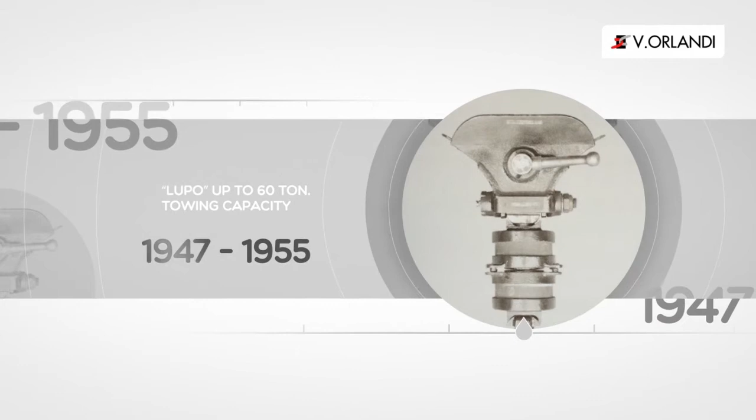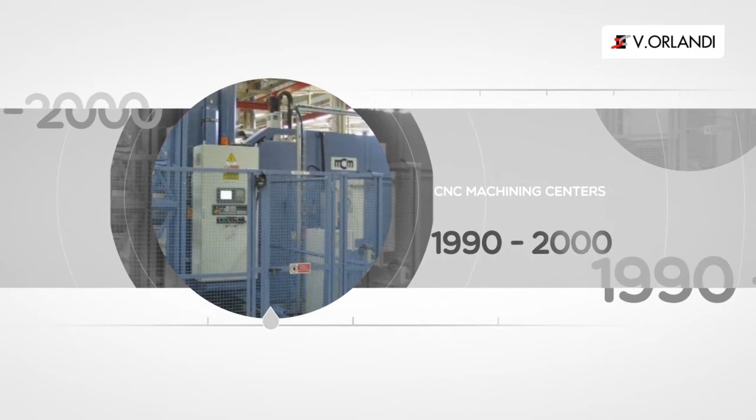The V.Orlandi product range includes manual and automatic drawbar couplings, pintle hooks, a full range of drawbar eyes, tow bars, 2-inch and 3.5-inch fifth wheels, mounting plates, fifth wheel sliders, ball races, landing gears, and kingpins. V.Orlandi is certified to ISO 9001 and ISO TS.

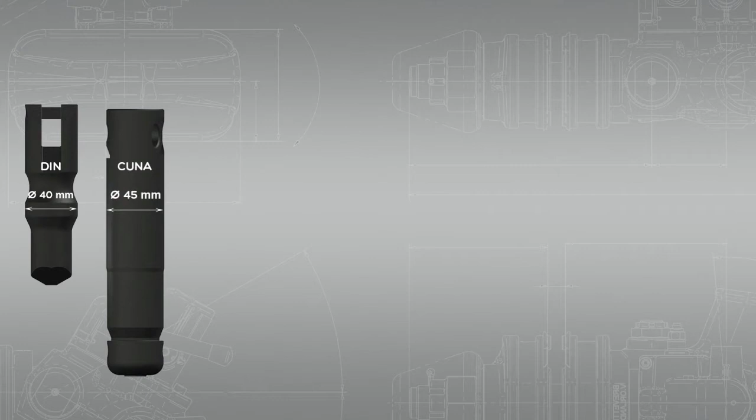V.Orlandi manufactures drawbar couplings according to national and international standards. German 40 mm DIN standard, Italian 45 mm Cuna standard, worldwide 50 mm ISO standard, French 50 mm BNA standard, Swedish 57 mm standard, V.Orlandi 70 mm heavy-duty standard, worldwide 76 mm NATO standard.

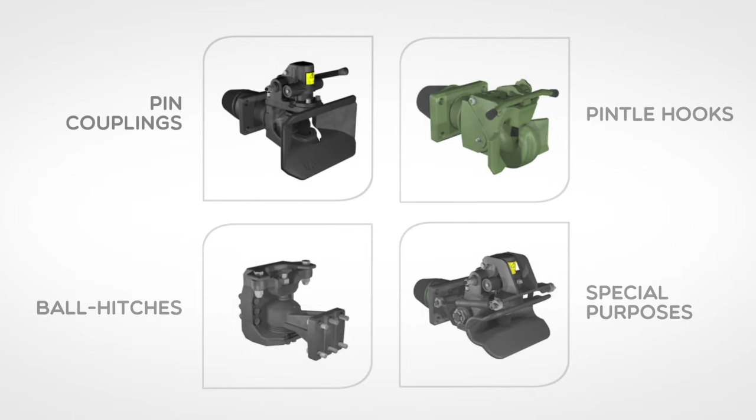Drawbar couplings can be divided into 4 main categories: pin couplings, pintle hooks, ball hitches, and special purpose. Pin couplings are those drawbar couplings with a certain diameter pin, a bell mouth, and an automatically closing and locking pin on the towing vehicle. The diameter of the pin follows national and international standards, such as ISO, DIN, Cuna, and BNA standards.

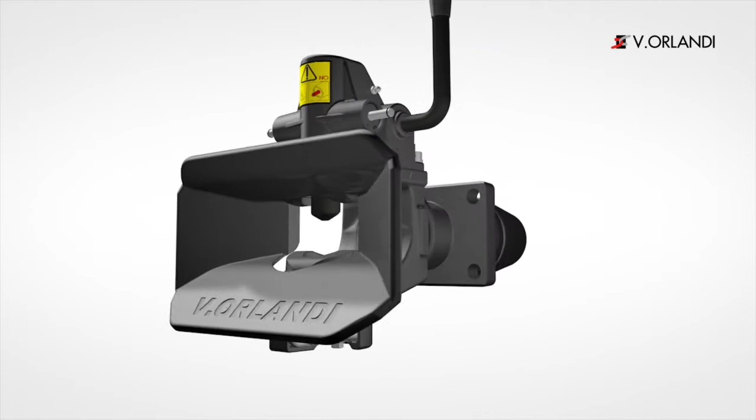Let's see an ISO standard coupling. The E50 is a rigid 50 mm automatic drawbar coupling. Automatic means that the operator has to open it manually, but during the coupling operation, the tow pin will close automatically. The 2 rubber buffers encapsulated into the rear flanges allow the drawbar coupling to absorb the shocks when driving. The 2 rubbers also maintain the tightening torque of the rear nut.

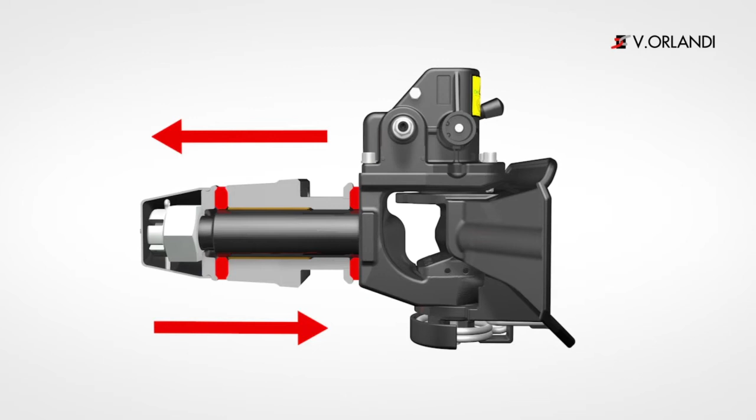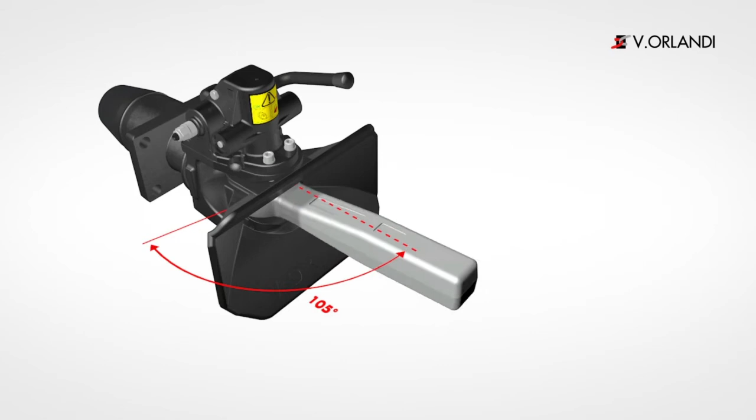This type of coupling is also called rigid, as the downwards and upwards articulation of the drawbar eye, up to 20 degrees, is made possible by the barrel shape of the towing pin. This type of coupling can articulate horizontally up to 105 degrees on both sides. Not everyone knows that all our E50 drawbar couplings can be opened at any angle.

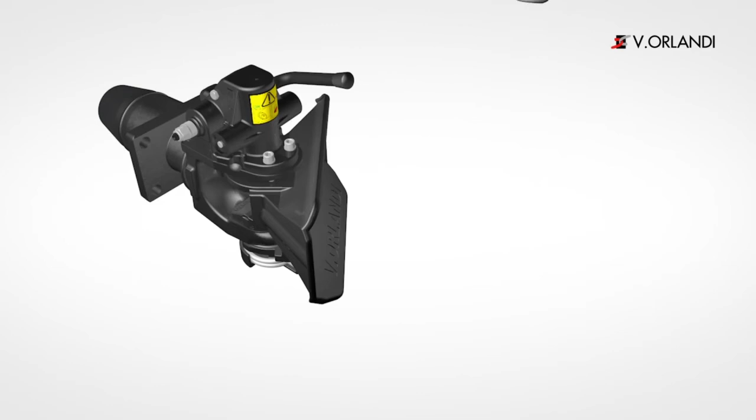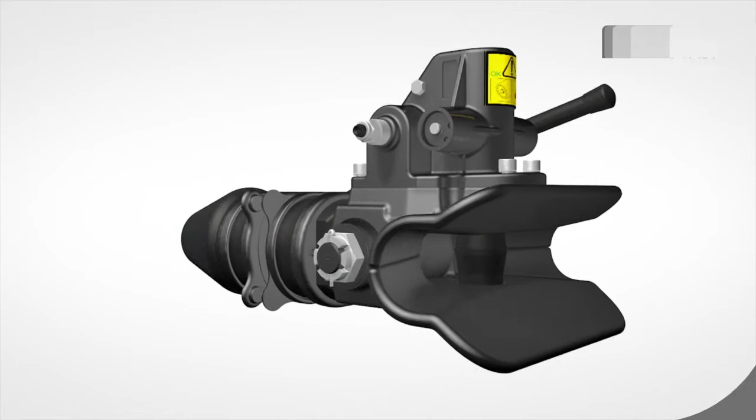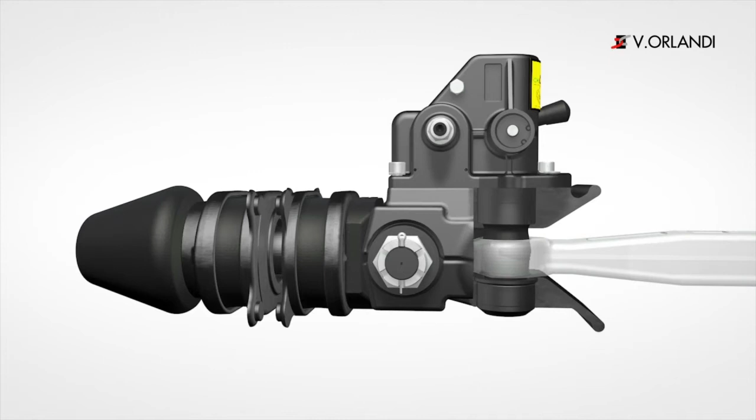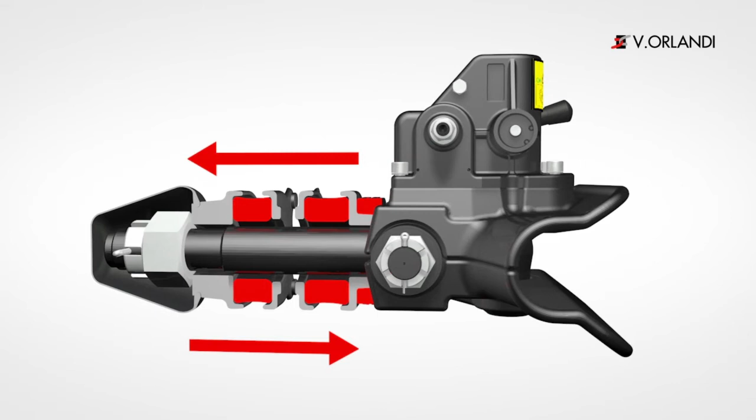Let's see a Cuna coupling. The EH50 is a pivoting 50 mm automatic drawbar coupling. Automatic means that the operator has to open it manually, but during the coupling operation, the tow pin will close automatically. The 2 rear rubber buffers allow the drawbar coupling to absorb the shocks when driving, and also maintain the tightening torque of the rear nut. The 3rd front rubber helps to keep the bell mouth in a straight position when the coupling is disconnected.

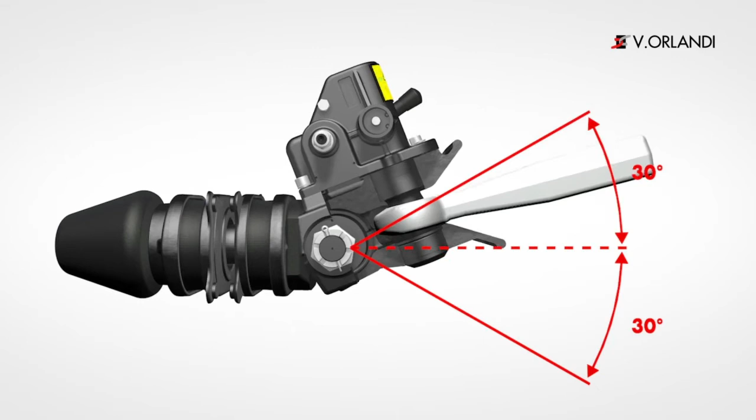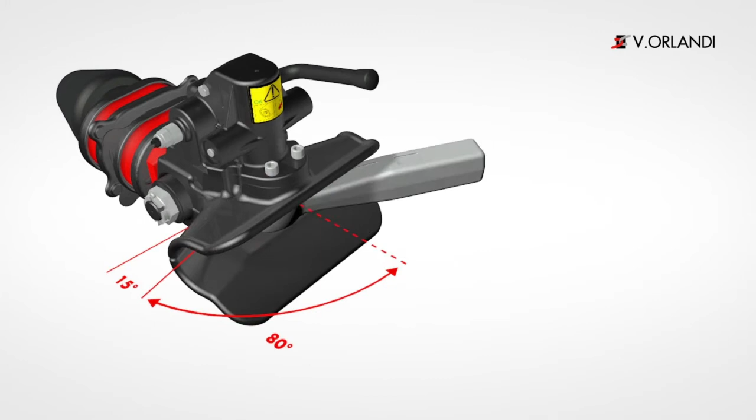This type of coupling is called pivoting, as the downwards and upwards articulation of the drawbar eye, up to 30 degrees, is made possible by the articulation pin. This type of coupling can articulate horizontally up to 80 degrees on both sides, thanks also to the 2 rear big rubber buffers that guarantee an extra 15 degrees of articulation. Thanks to their high articulation, these types of coupling are recommended for off-road applications.

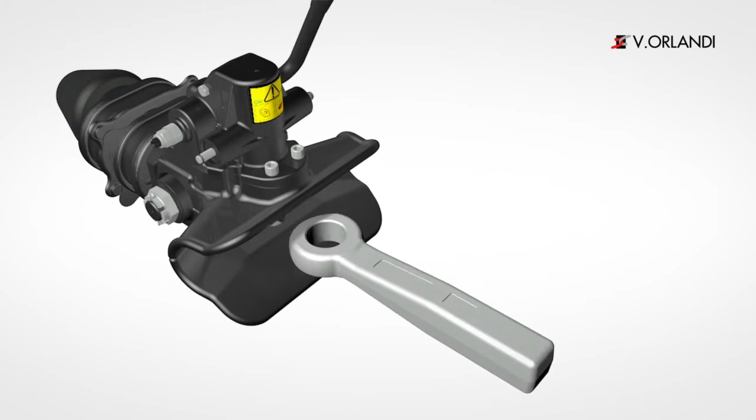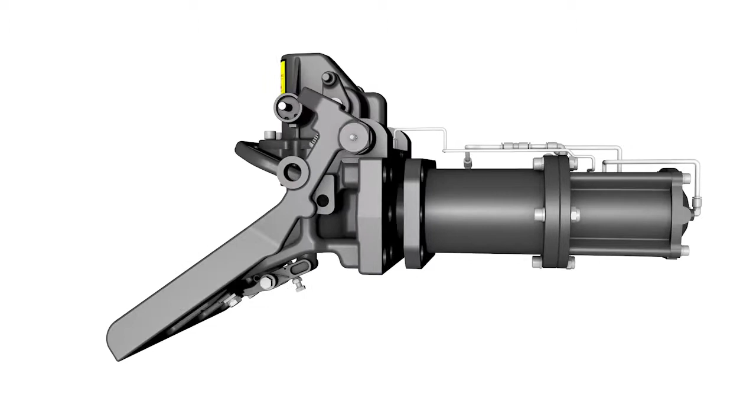Let's see a BNA coupling. The MV50 is a rigid flanged automatic drawbar coupling. Once the operator has released the mechanical safety device, he just needs to push the flap upwards and the coupling will be opened. During the coupling operation, the tow pin will close automatically. The hydraulic piston rod allows the MV50 drawbar coupling to absorb the shocks when driving.

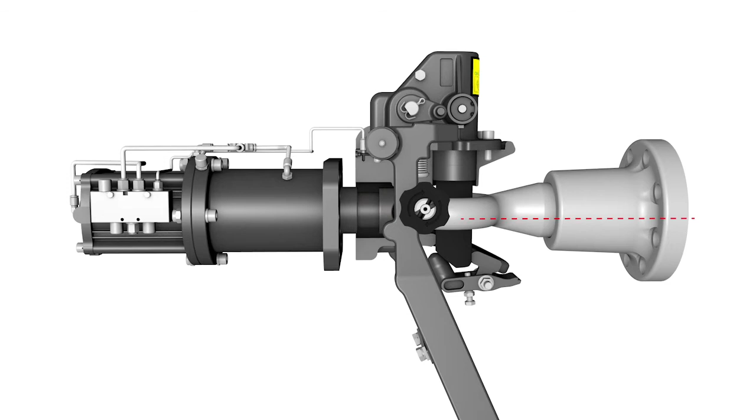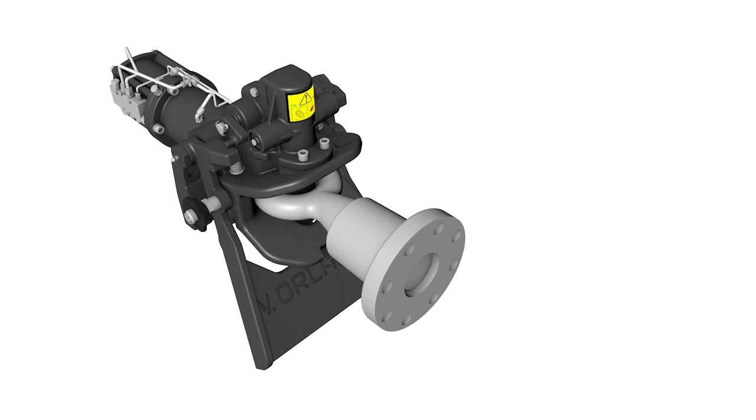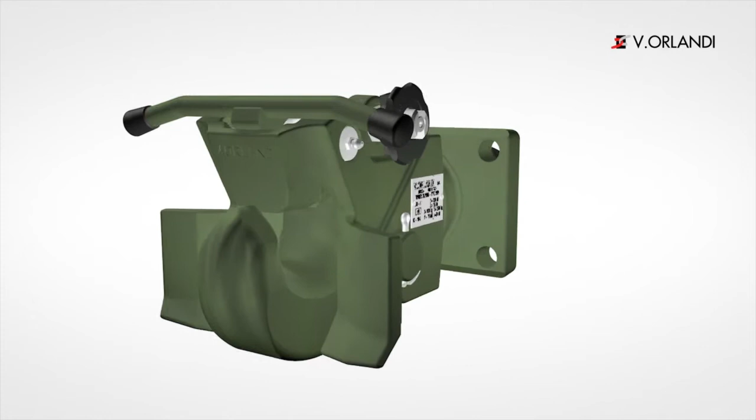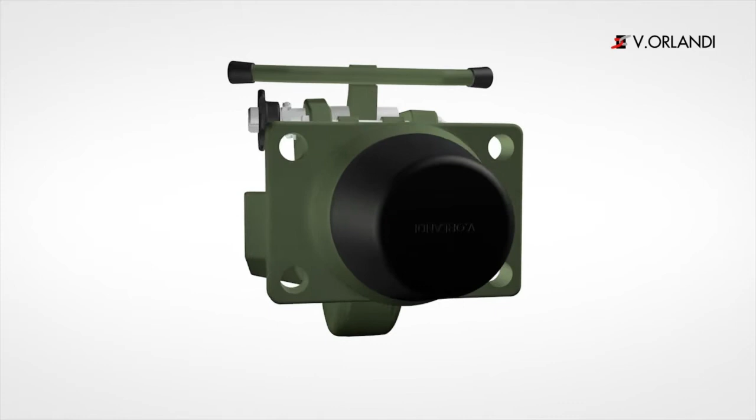Let's see a NATO pintle hook. The UN90 is a rigid 76mm automatic pintle hook. The UN90 is a dual-use coupling, as it can be used for military purposes as well as for civil ones. After releasing the mechanical safety device, the operator has to open it manually. During the coupling operation, the hook will help the operator to close the hitch properly.

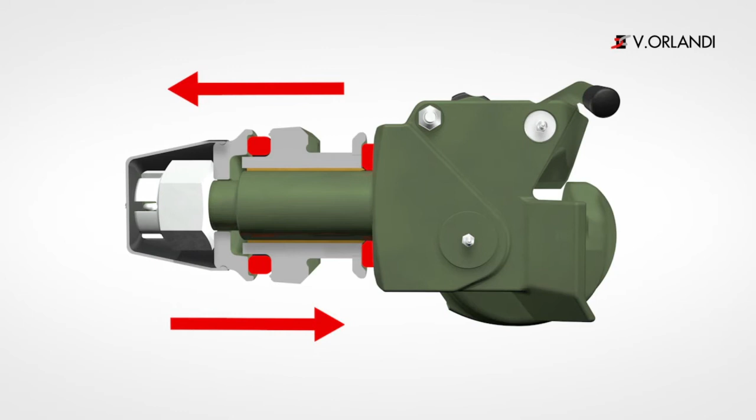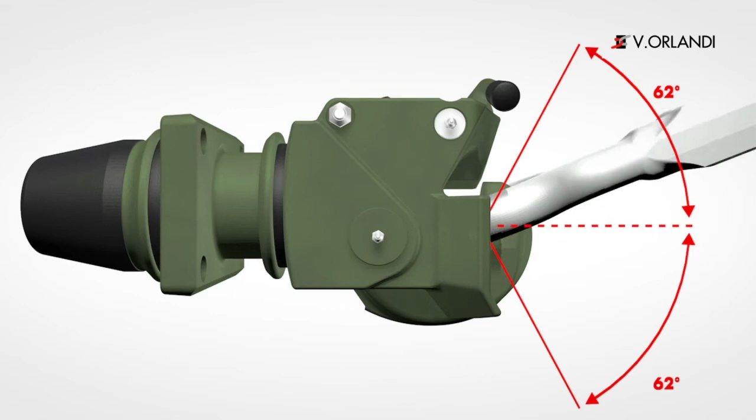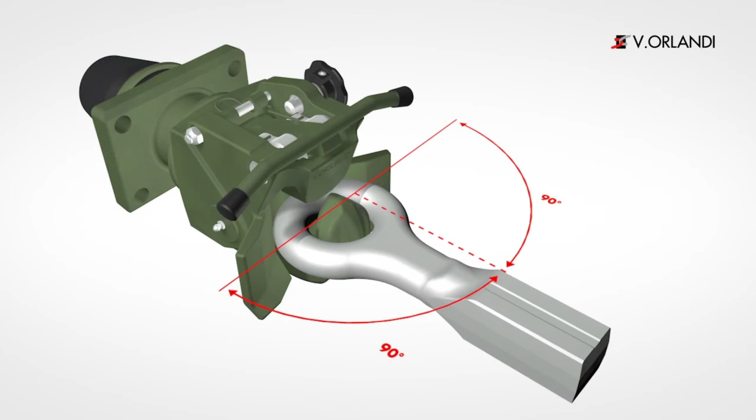The two rubber buffers encapsulated into the rear flanges allow the drawbar coupling to absorb the shocks when driving. The two rubbers also maintain the tightening torque of the rear nut. This pintle hook allows the NATO drawbar eyes to articulate downwards and upwards up to 62 degrees. Horizontally, this pintle hook can reach up to 90 degrees on both sides. The articulation guaranteed by our UN90 series is the highest in the market.

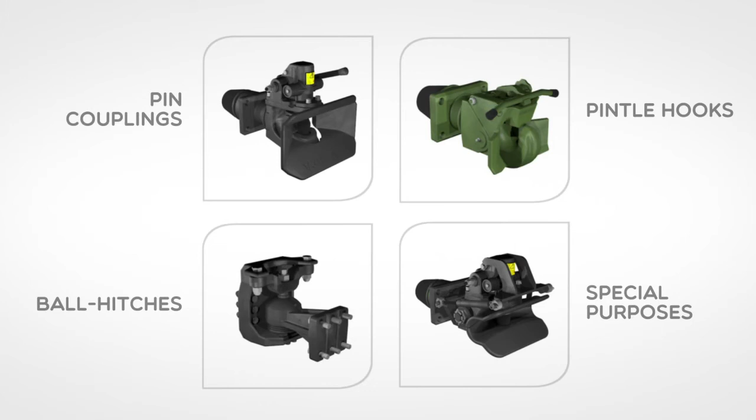Let's see a ball hitch coupling. The GS900 is a special-purpose manual ball hitch drawbar coupling. Manual means that the operator has to open and close it manually, as this type of coupling is normally used where the operators seldom disconnect the combination.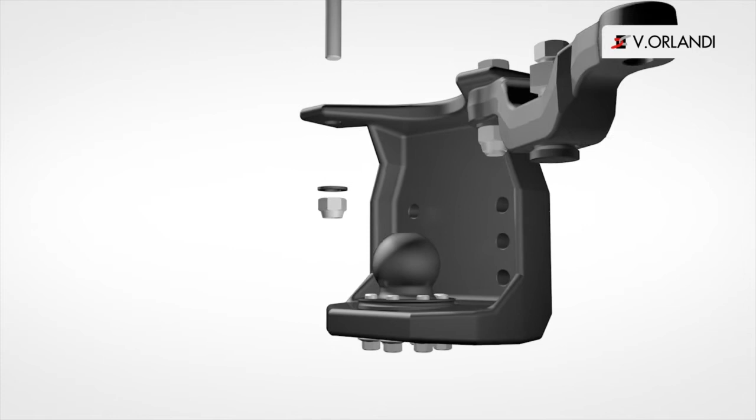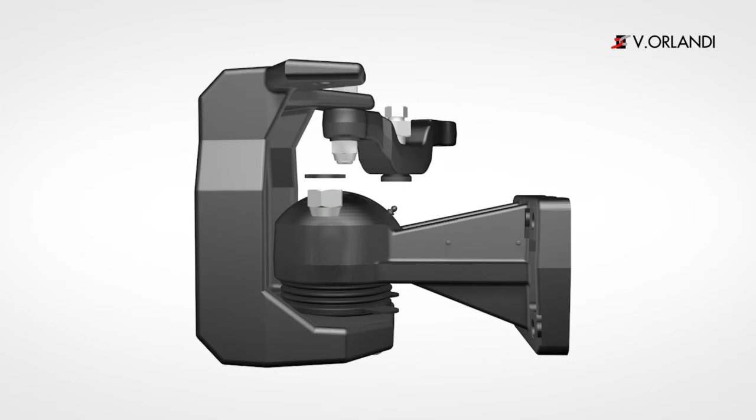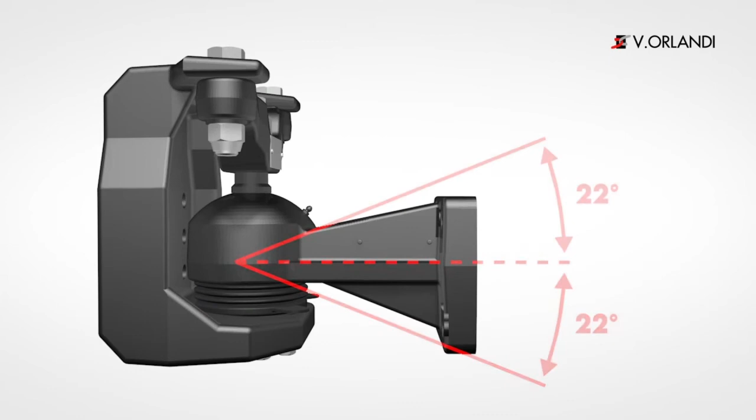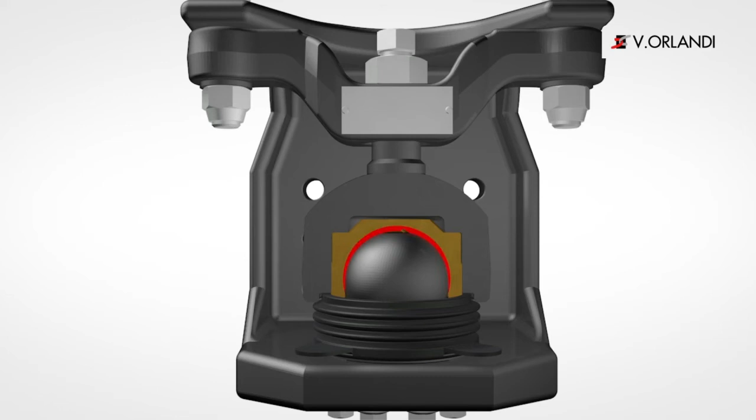The dedicated drawbar eye can reach up to 22 degrees downwards and upwards. Horizontally, the drawbar eye reaches up to 90 degrees on both sides. The bronze bush pressed inside the drawbar eye is a sacrificial component, so it has to be replaced periodically. However, before replacement time the operator can adjust the play between the ball hitch and the drawbar eye using the top adjustment screw. The adjustment will increase the life of the bronze bush itself. The GS900 was designed specifically for car transporter trucks and trailers.

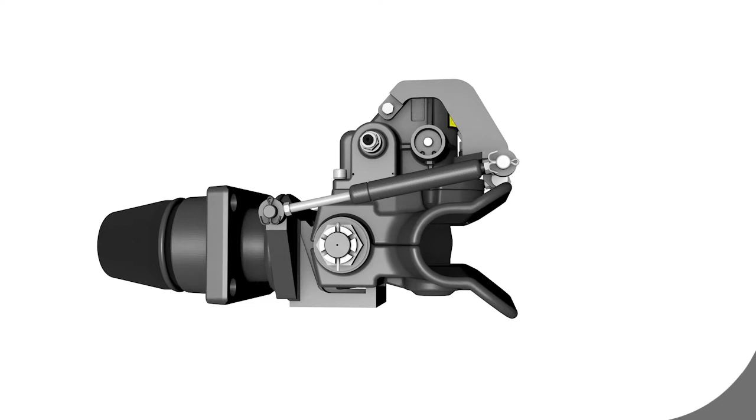Let's see a special-purpose coupling. The EH524 is a special pivoting 50mm automatic drawbar coupling. Automatic means that the operator has to open it manually, but during the coupling operation, the tow pin will close automatically. The two rubber buffers encapsulated into the rear flanges allow the drawbar coupling to absorb the shocks when driving. The two rubbers also maintain the tightening torque of the rear nut.

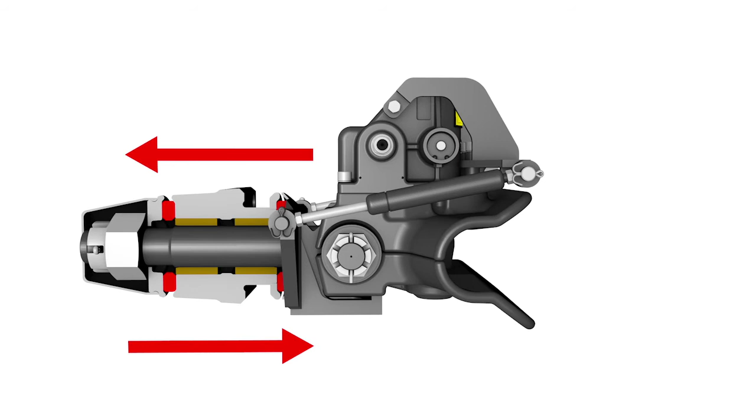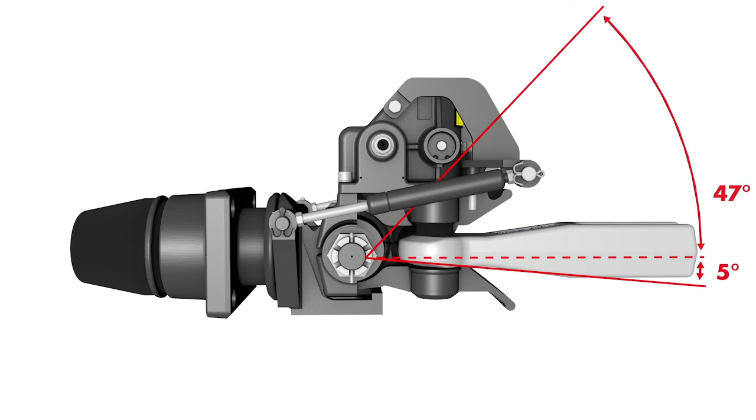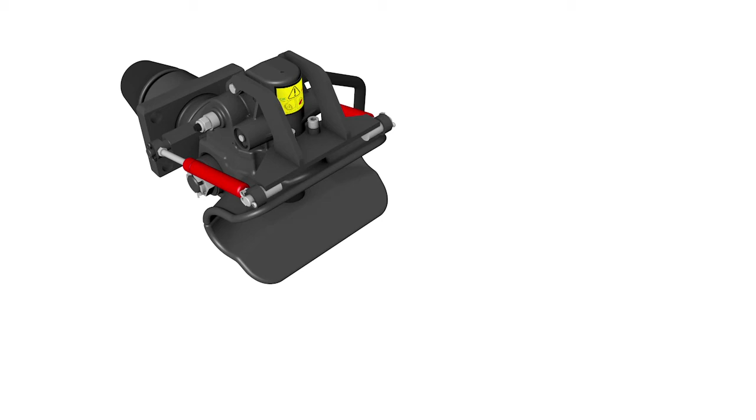This type of coupling is called special pivoting, as it can reach up to 47 degrees upwards. The EH524 can articulate horizontally up to 80 degrees on both sides. The two gas struts keep the bell mouth in the straight position when the coupling is disconnected. The EH524 was specifically designed for Australian tip-over axle trailers.

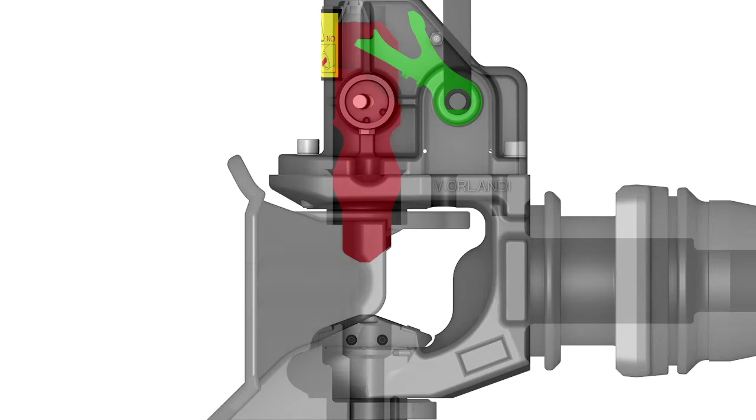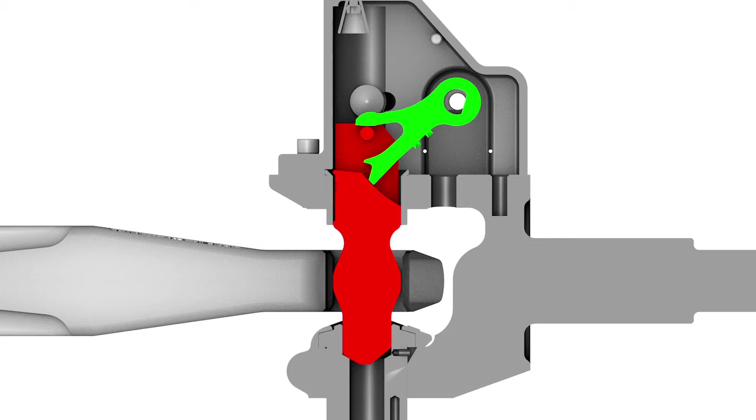V.Orlandi manufactures three types of coupling mechanism. The pin release mechanism is the most common system in the automotive market. The lifting green lever lifts the tow red pin upwards and compresses the top cone spring. The tow pin is kept in the open position by the lifting lever's machined step. During connection, the tow pin will lift up to a point where it will be forced to exit mechanically from the step. The compressed top cone spring will also help the tow pin to stay in the open position. The same scenario will happen when disconnecting.

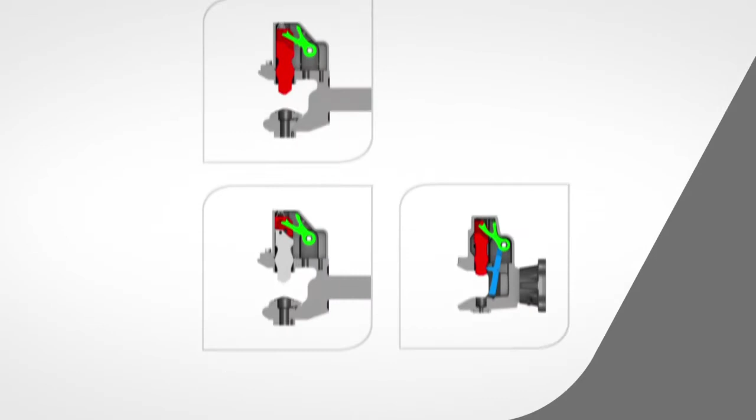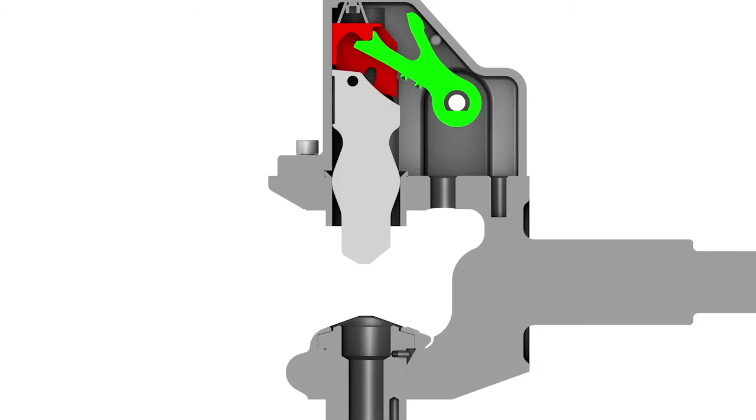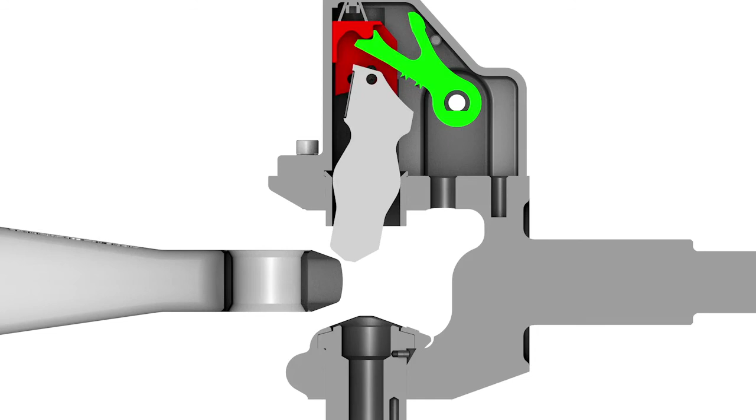The pivoting release mechanism is a brand new V.Orlandi patented system. The lifting green lever lifts the tow red and gray pin upwards and compresses the top cone spring. The tow pin is kept in the open position by the lifting lever's machined step. During connection, the tow pin will lift up to a point where it will be forced to exit mechanically from the step. The compressed top cone spring will also help the tow pin to stay in the open position. When disconnecting, the tow pin will remain in the open position so the operator and the coupling will be ready for the next connection.

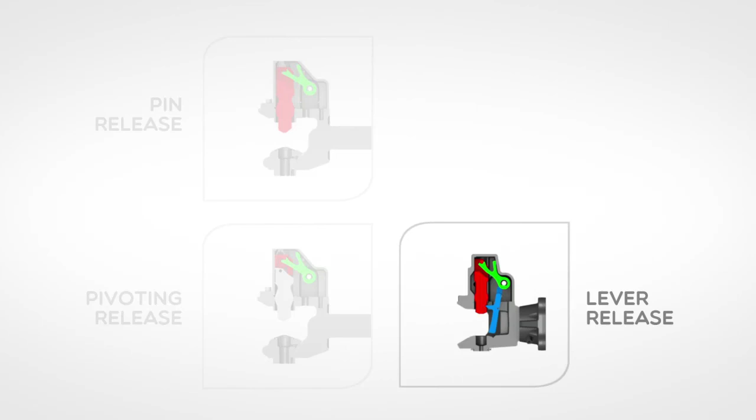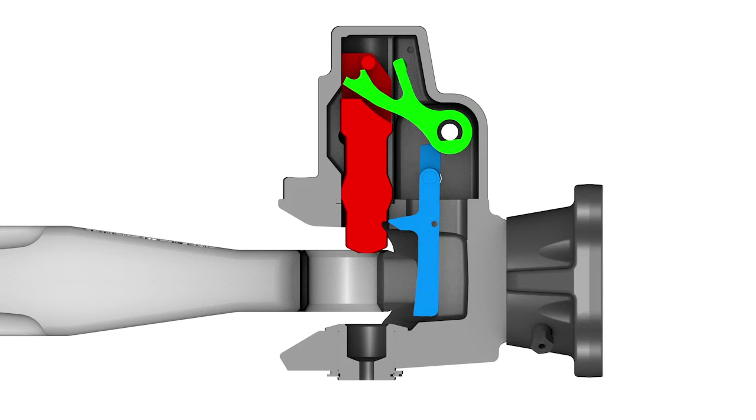The lever release mechanism is the most common system in the agricultural market. The lifting green lever lifts the tow red pin upwards, while the blue finger lever moves forward. The tow pin is kept in the open position by the blue finger lever. During connection, the drawbar eye will push the finger lever backward, releasing the towing pin, which will drop down into the closed position. When disconnecting, the tow pin will remain in the open position as the finger lever will keep it locked. The operator and the coupling will be ready to reconnect. This type of coupling can be used with different types of drawbar eye in terms of diameter and thickness.

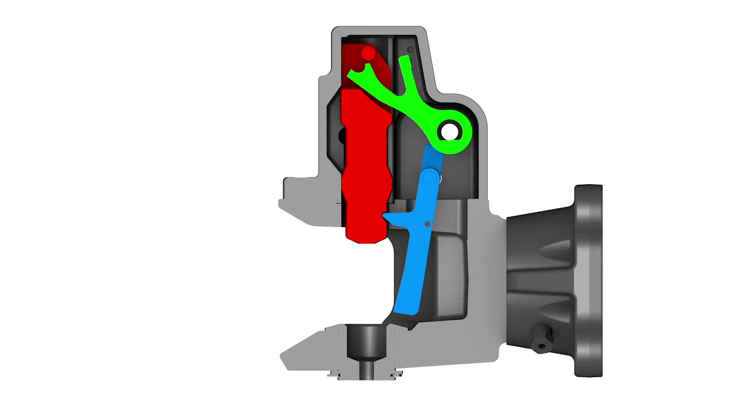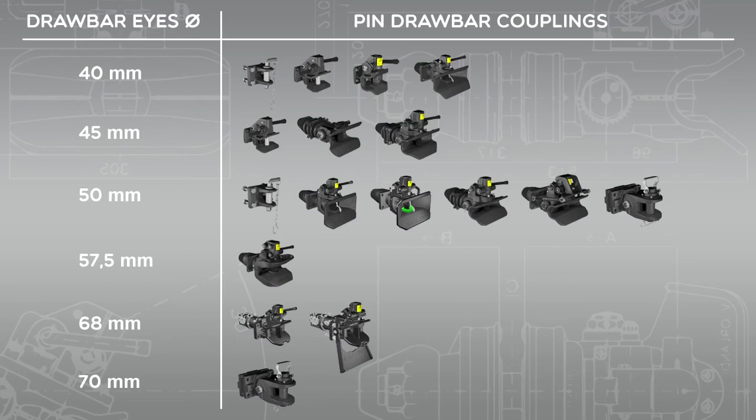V.Orlandi's product range includes manual, automatic, rigid, and pivoting pin couplings to suit different drawbar eye diameters, such as 40 mm, 45 mm, 50 mm, 57.5 mm, 68 mm, and 70 mm. The V.Orlandi product range includes a full range of pintle hooks, ball hitches, and special-purpose drawbar couplings made for dedicated applications.

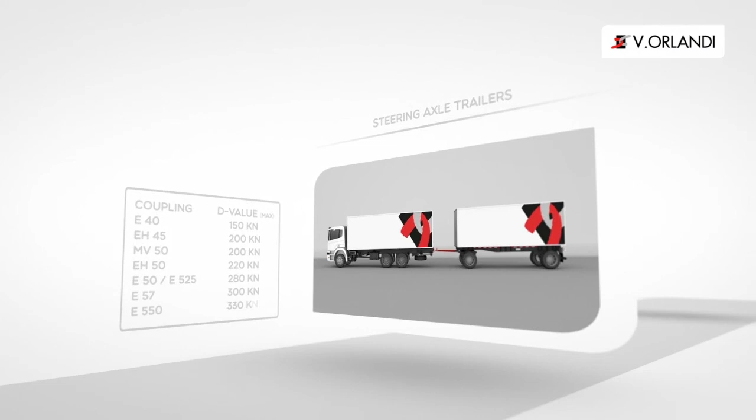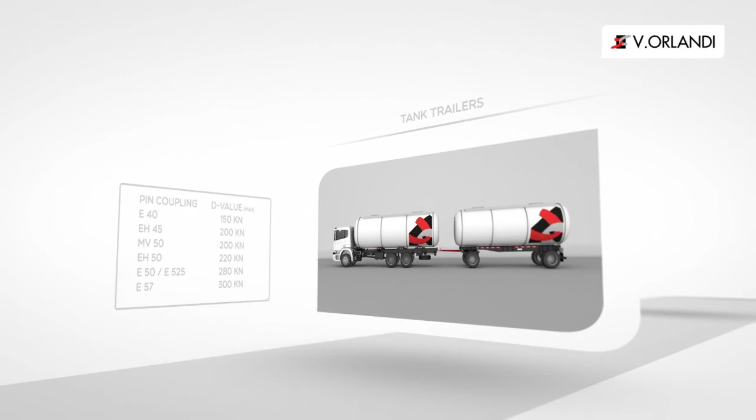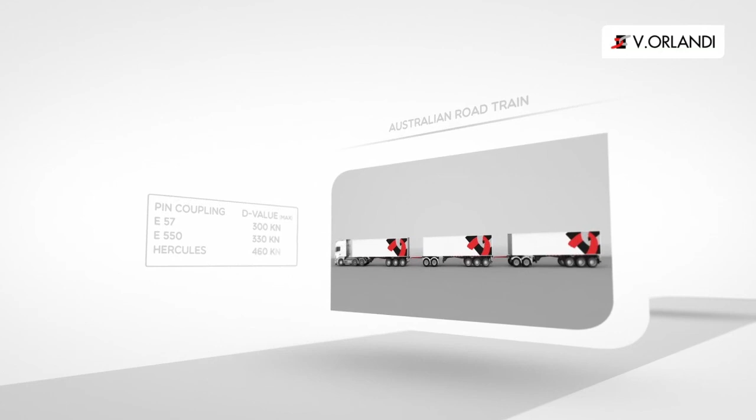Thanks to the complete product range and the well-established sales and support network, V.Orlandi is able to satisfy the specific requirements of any application in the world, such as steering axle trailers, central axle trailers, tank trailers, car transporter trailers, heavy-duty haulage trailers, Australian road trains, tip-over axle trailers, dual-use trailers, vans and light-duty trailers, airport trolley carriers, agricultural trailers.